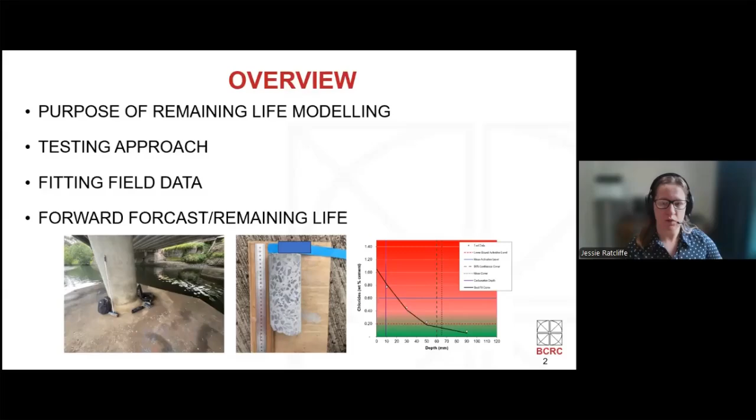We'll look at a basic model and the steps between our site tests and calculating that remaining life.

So there can be different reasons why an asset owner might want to investigate our current condition and then model the remaining service life. We may want to know the remaining life of buildings or bridges that were constructed prior to the existing design codes, therefore may not be compliant with current requirements, or for which we have limited information.

Drawings often get misplaced, or they're lacking key information, or that one guy who knew everything retires. It might also be a limited inspection history, so we don't fully understand how the structure has been performing during service compared to the design.

In other cases, we may be asking a structure to continue service life beyond what would reasonably be expected as the original design life. This could be for heritage reasons, like these 100-plus-year-old concrete bridge piles on the side here.

Or we may also want to keep the older structures for sustainability reasons. So why replace a structure and consume new materials when the existing thing is still fit for purpose? Adding on to that, keeping the old structure may be able to reduce costs.

Our on-site tests and modelling can be used to validate our design assumptions using actual service data and can provide updated service life if the service conditions change. For example, our changing environment may be affecting the structure differently.

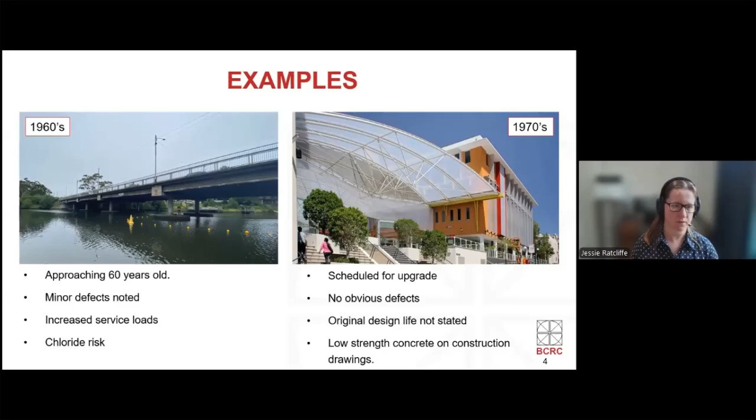So they can ensure that the upgraded building has an appropriate service life, so they've put in all that effort and can keep the structure for a long time.

Step 1 of our testing and modelling is the visual inspection, non-destructive or semi-non-destructive testing. In addition to visual defect mapping, you might complete half cell potential mapping or delamination testing, and other tests to hone in on areas of interest.

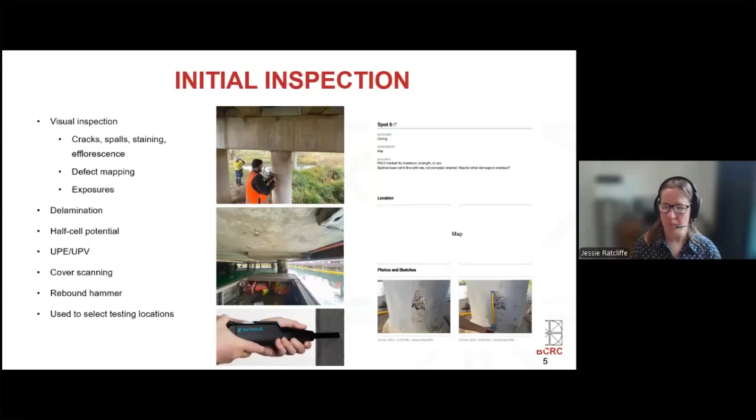Key tests we need to complete to understand the deterioration state of an existing reinforced concrete structure is the carbonation depth. Carbonation is the reduction of pH, also known as neutralization of the concrete, due to ingress of carbon dioxide from the atmosphere. During this process, carbon dioxide infiltrates the concrete and reacts with the calcium hydroxide in the cement paste. We've got some equations outlining this process here.

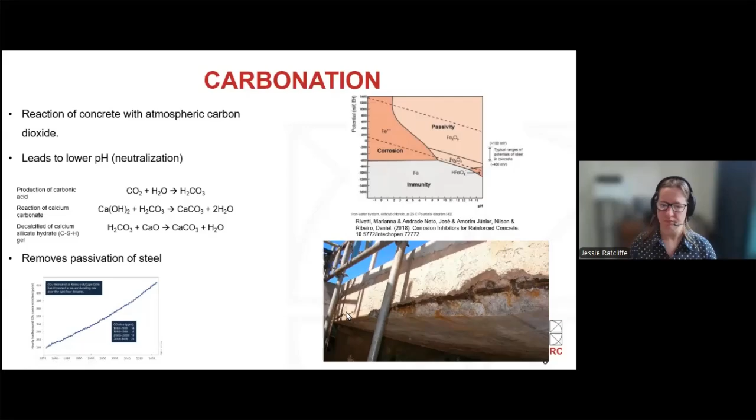So we test for carbonation using a 1% phenolphthalein spray. The spray is just a pH indicator that gives this lovely pink color when applied to uncarbonated concrete, and then it turns clear where the pH is below about 10.

The spray is applied onto fresh concrete, so either a core sample that you've taken and then split, or a hole that's been drilled and cleaned out. We can then measure the carbonation front, that's the interface between the two colors.

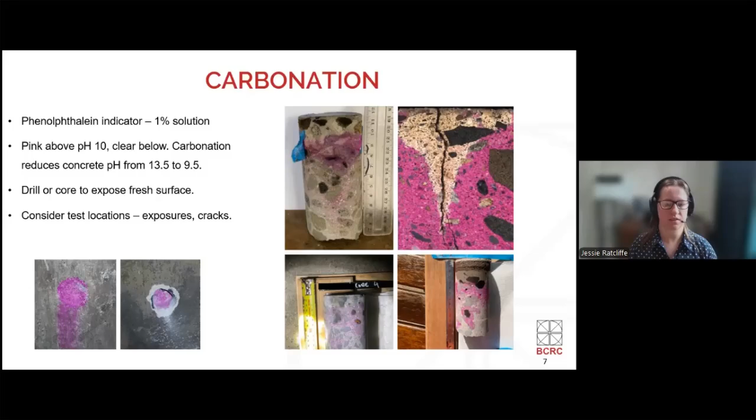We're also interested in the chloride profile of the concrete, that is the amount of chlorides present at different depths towards the reinforcement. Chloride ions enter the concrete by diffusing through the pores or through cracks, such as mechanically induced or shrinkage cracks. When the chloride ions reach the reinforcement, they can induce corrosion.

Similar to carbonation, they're thought to disrupt the passive film on the steel, reduce the pH level of the pore solution, and serve as a catalyst for oxidation of the reinforcement. Chloride-induced corrosion can be particularly aggressive in marine environments, but it's also an issue further inland where wind can carry chlorides. Magnesite toppings might exist, or chlorinations for pools and road salt can give you those chloride ions.

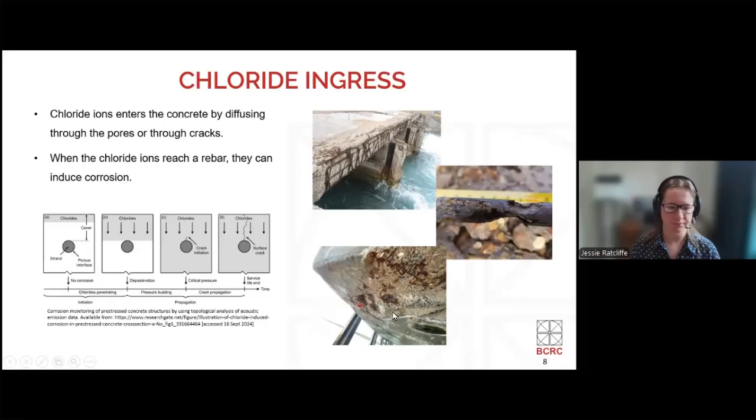We test for chlorides by taking a concrete core sample. The sample's location should be selected based on that problem-oriented approach using the inspection, or the half cell potential map, which might show you areas where we have a higher chance of corrosion occurring and should be investigated.

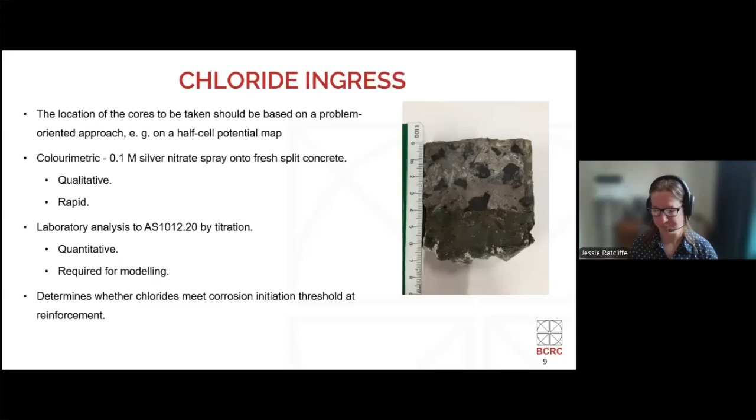This core also has a pheno spray applied, which is why we get this Neapolitan effect, because we're doing both tests. This test is fairly quick, but it doesn't tell us the specific amounts at each depth in the core. So to find that, we need to do lab analysis where we grind up each level and find the amount of chlorides via titration. This gives us quantitative information on chloride levels that we can use for our modeling.

The next piece of information we need is the concrete cover to reinforcement. It's because the cover is the protective layer between the steel reinforcement and the chlorides or the carbonation or any other aggressive species that might be present.

Once data is collected, we can assess the cover for the element or for the structure, and how we present this information actually varies based on the project. So we can consider minimum cover if it's a critical element, or we want a particularly conservative assessment.

But that might be overly conservative if you just have the one bar that's sitting a bit high and can be treated locally. Median and average are more common, but you could misrepresent the risk in the structure if the cover is very variable. So often we use the 95% confidence interval cover found via statistical analysis, and that covers most conditions in the data set.

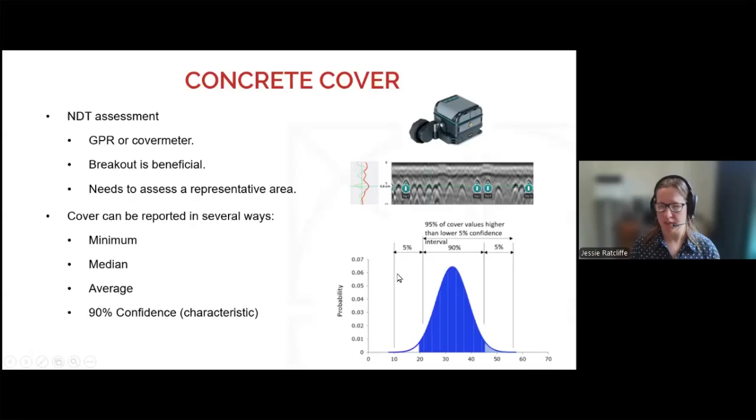In addition to our key condition assessment data, there are a few other factors we can measure while we're out there, including our cement content. If we're finding our remaining life based on chlorides, this is important because we are looking for 0.4% chlorides per weight of cement, not per weight of concrete.

So we need to know that cement content. We can also look at the reinforcement, do a breakout, particularly in areas that have those defects we noticed in the first stage, and assess any corrosion on the reinforcement, measure the size, and see if it's a plain bar or deformed bar. Can also consider measuring sulfates if our exposure suggests that might be a problem, and find structural details such as compressive strength of the concrete and the bar diameter.

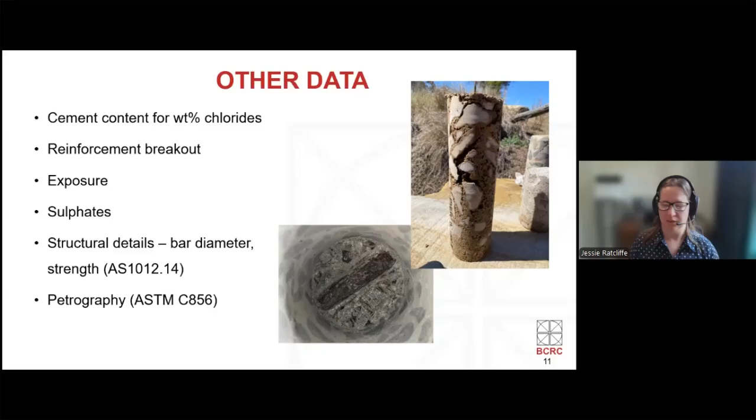Could also, if you think there's a risk of alkali aggregate reaction or something else, take petrography cores. Cores are also great for checking things like voiding and compaction in the sample. We have a really great example of some interesting compaction on the right here.

So now that we have our field data, we can start with the actual modeling. Our early service life estimates were just based on the square root of time approach and empirical data, sort of experience, to give us a minimum cover of concrete that should delay the onset of corrosion. So over time, that's been refined into deterministic models and full probabilistic models.

One of the documents that explains these principles of service life design and calculation is the FIB Bulletin 34 model code. This document presents strategies for service life design of concrete structures, including the concept of chloride-induced corrosion, modeled by diffusion through concrete according to Fick's second law.

When the corrosion is caused by chloride ingress, the service life is usually assumed to be equal to the initiation time, so when that steel is depassivated by the chloride and corrosion can start. We don't really consider the propagation, so the actual corrosion and spalling carrying on, because that can be relatively short in duration compared to the life leading up to that point.

And we don't really know, there's a lot of uncertainty around the consequences of localized corrosion. So exactly where that spall occurs could make it critical or a non-issue. So we don't consider that section.

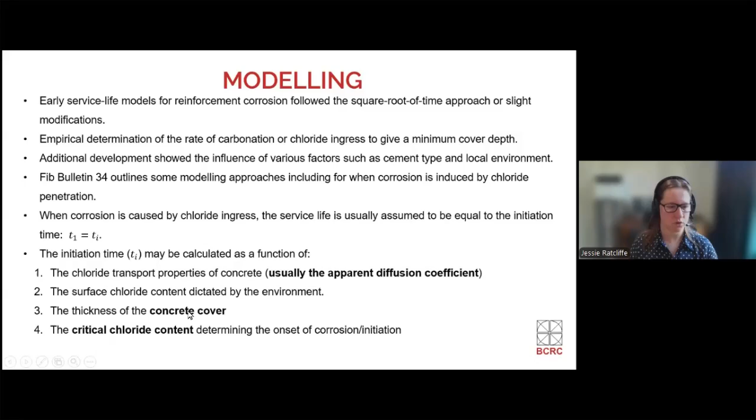Our initiation time, so our start of corrosion, is calculated using the apparent diffusion coefficient, which we'll calculate in a second. Our surface chlorides, thickness of concrete cover, which we've already talked about, and the critical chloride content, that 0.4% weight of cement.

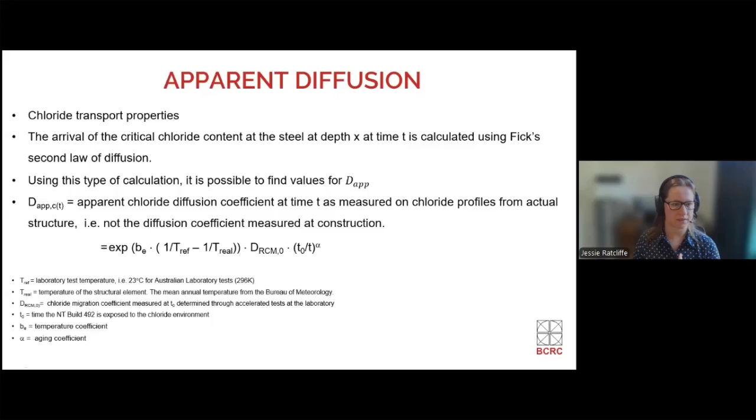So our first one is the apparent diffusion coefficient, which is our chloride transport properties. It's the equation there - we'll show it on a graph shortly, which is much easier.

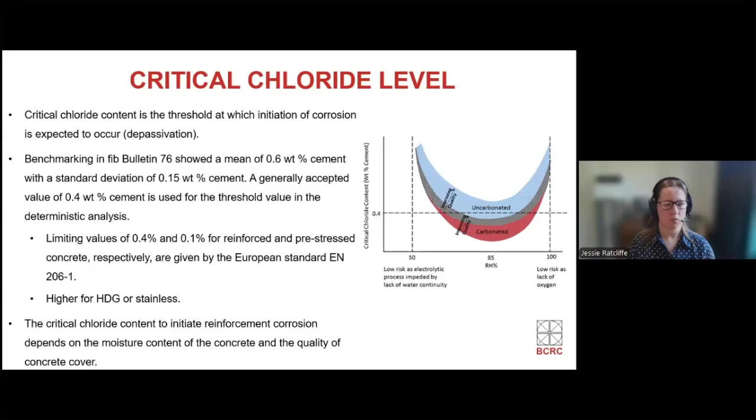Our critical chloride level is the amount of chloride at that reinforcing bar that we consider to be when it's likely to start corroding. It's typically taken as 0.4%, but different reviews and studies show, including the benchmarking FIB Bulletin 76, that is a fairly wide range. So it depends on your reinforcement, it depends on your structure, but the 0.4 weight percent is what we'll be using today.

So that chloride level is our service limit state. So that's where we're saying that the structure has passed beyond what we accept to keep it in service.

And that is defined by the asset owner, so it's whatever they're comfortable with. The 0.4% weight percent chlorides is commonly used, but it doesn't have to be that.

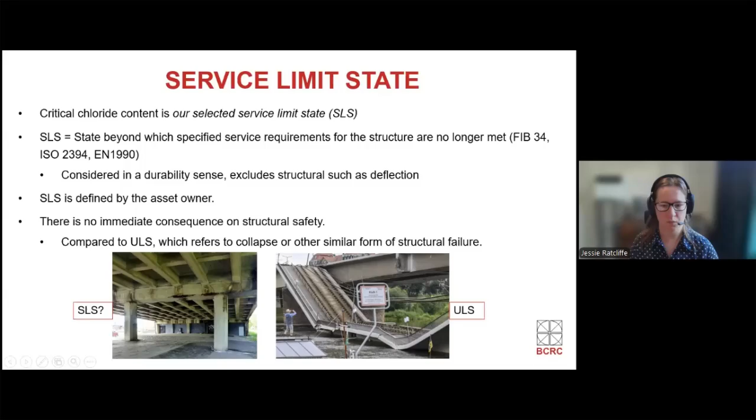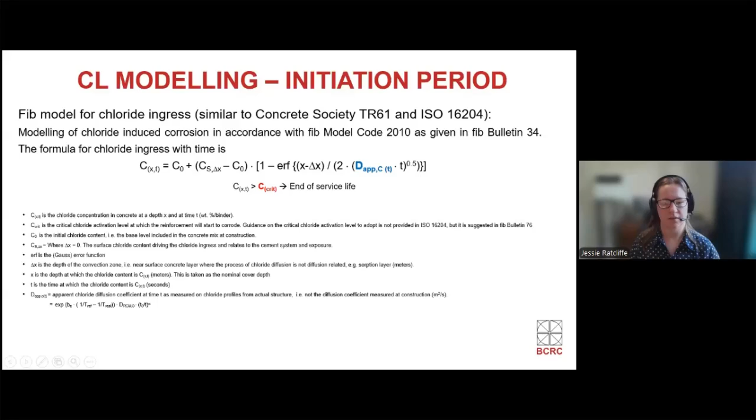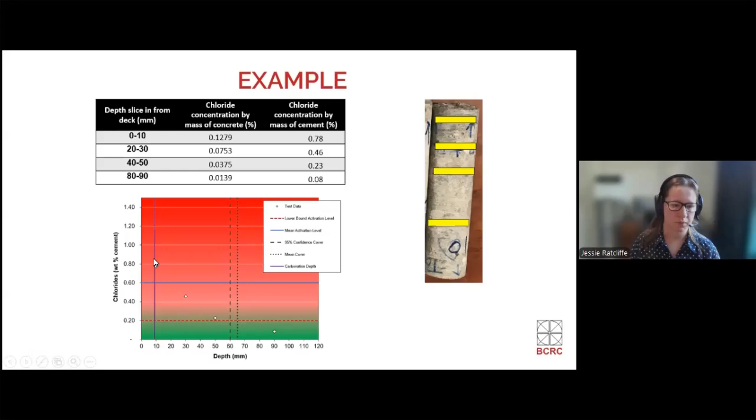So to show how this all works, I've got some example data. Say this is our core, and we've sliced it at the level shown on the right. We have this chloride data as weight of cement. We can plot it, and you can already see a curve sort of appearing. Then using our equation from the model code and the least squares method, we can fit that curve and find our apparent diffusion coefficient.

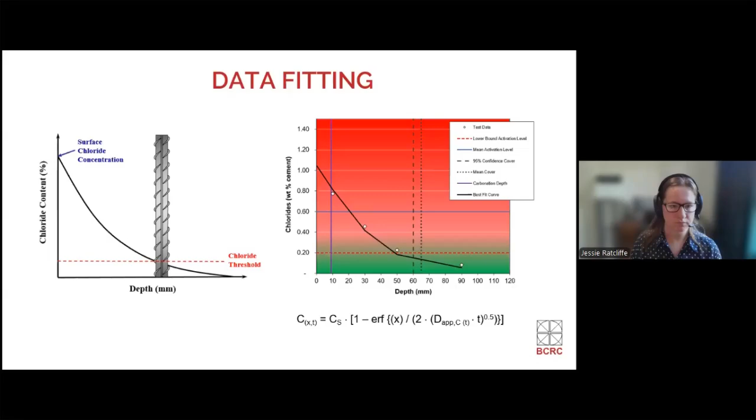So that is based on site data. That's not the diffusion coefficient that would have been measured at construction or present in your spec or your mix design. That's based on what we've really found.

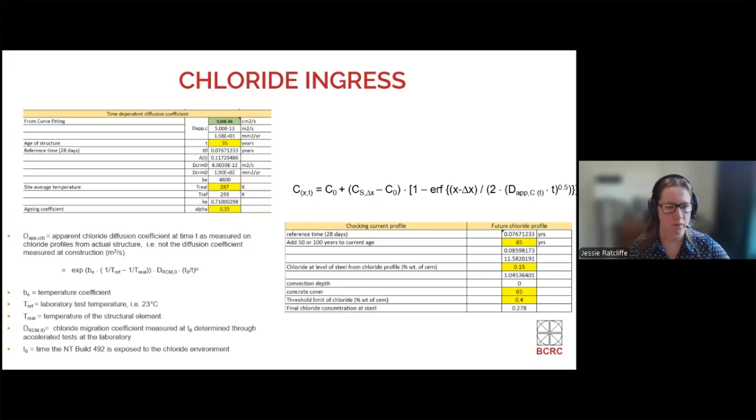Using the equations, we can then take our diffusion coefficient and calculate curves for the chloride amount at different times, using the current age of the structure, the average temperature either from BOM or from site measurements, and then the aging coefficient. And we finally get to our final plot.

So we have a plot of our current chloride levels heading towards the reinforcement cover, represented by the vertical dotted lines—that's our average and characteristic covers. You can see initially we're nowhere near our critical level of 0.4 weight percent of cement.

However, after 50 years—that's our yellow line—we are getting pretty close. We might be considering that in localized regions where we've found a higher bar with less cover, we could be considering some issues.

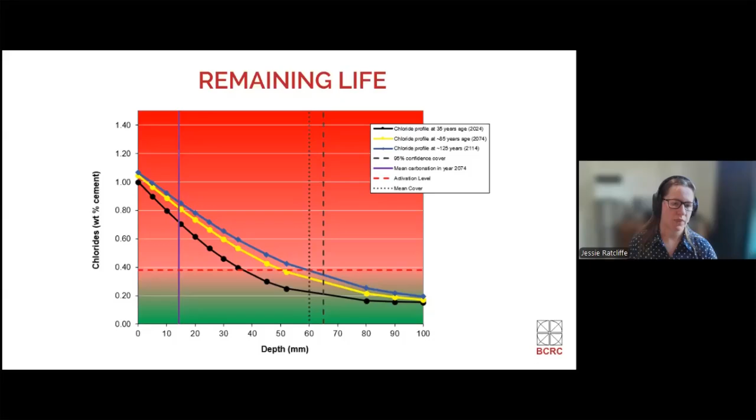And then our service life ends when the structure is 125 years old—90 years on—where it intersects our average cover. So what do we use this data for?

Now that you know your service life, well, in our example of the university, they have opted to do additional testing that creates more representative data and can be used for a full probabilistic model, which is often less conservative because they want a little bit more certainty before they move forward.

You might use the data to focus on problem areas, engage in repair and strengthening if it's approaching end of life but you want to keep it going.

Or in the case of, say, our 90 years left, that seems like plenty. We can just use that for proactive maintenance and planning of costs, so we know when we're going to have to start thinking about replacing the structure based on that knowledge. That's useful for asset managers who want to work proactively instead of reactively.

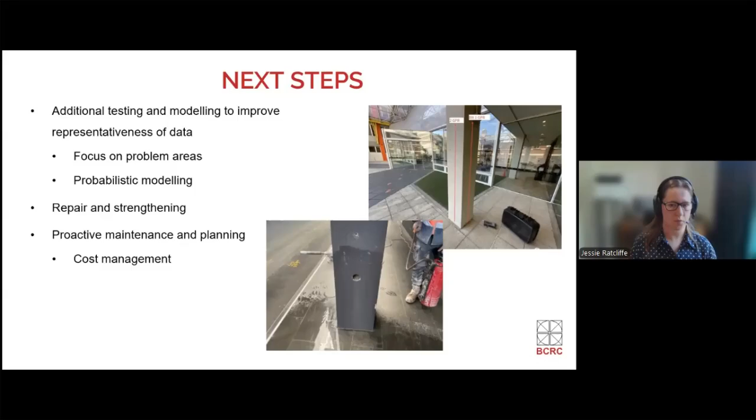And that's it. Thank you very much.

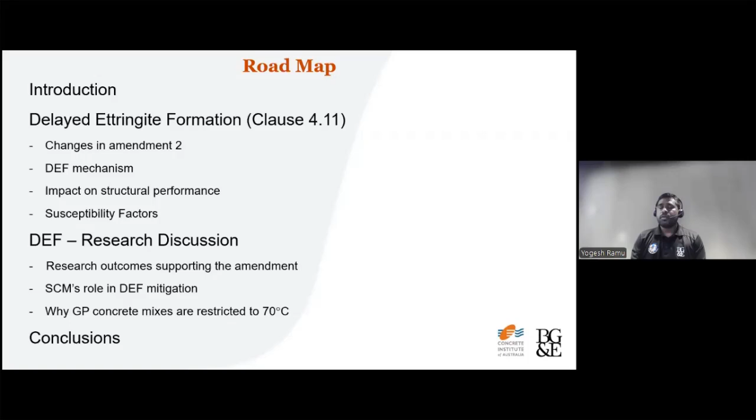Maybe it's just my interpretation of why these changes are made. I'll also talk about some other researchers' results and outcomes to support this amendment 2. Then we'll talk through SCM's role in DEF mitigation, and why GP concrete has a lesser maximum curing temperature allowance. Then we'll wind up this presentation.

So first, what are the changes made in the 4.1.1 amendment 2? So until 2018 amendment 1, all concrete mixes had to satisfy the 75 degrees Celsius maximum allowed curing temperature.

Unfortunately, it wasn't differentiating between plain concrete mixes and concrete mixes with SCMs in it. Although the performance is actually very different between an SCM mix and a GP mix in terms of strength development, heat of hydration, and resistance to many durability issues, it doesn't differentiate. Also, another issue is it doesn't provide any approved method to justify it.

It just says if some analysis is provided to exceed the limit, is anyone okay with that when there is no approved method in the standard? So the welcome move in amendment 2...

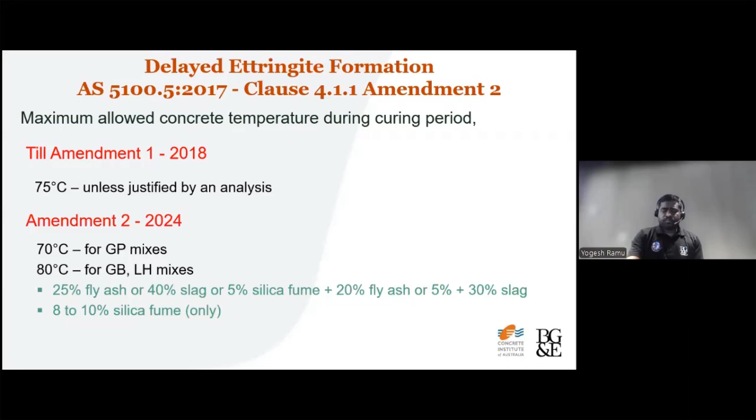So to understand and make sense of these amendments, we have to understand what ettringite is, and what delayed ettringite formation is, first. Then we'll talk through why this amendment makes logical and scientific sense. So what is ettringite first?

Ettringite is one of the various hydrates actually forming in concrete. It's basically a calcium sulfoaluminate hydrate. During the initial hydration phase of concrete, if it's precipitating, we call it primary ettringite. It doesn't harm the concrete; in fact, it has some benefits to the concrete.

So that's not an issue, but the issue is ettringite is highly unstable when it comes to resisting high temperatures. So if the concrete is actually hydrating at a very high temperature, say for instance anything above like 70 to 80 degrees Celsius, the ettringite can disintegrate, decompose to monosulfate and sulfate ions in the concrete.

So what can actually happen - I'll just use the laser pointer to point out. The black dots in the graphical representation in the slide actually represent monosulfate. So what this can do is, in the concrete during its service life, when the concrete temperature goes back to normal, and when there's a favorable situation for the alkalis in the concrete to leach out from the system, say for example exposure to water or something...

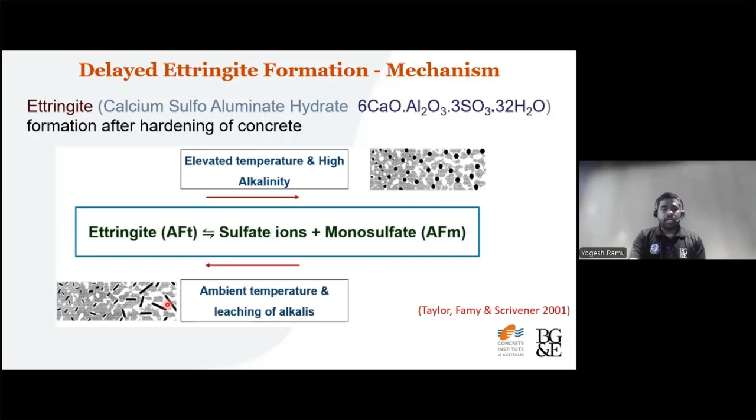So as I said, it could impact the durability of the structure. I'd like to explain it through a couple of examples.

When it is tested, it actually has a lot of needle-like ettringite precipitated in the precast sleepers. So in general, people think DEF can be an issue in precast concrete, but not in in-situ concrete. But it's actually not so true.

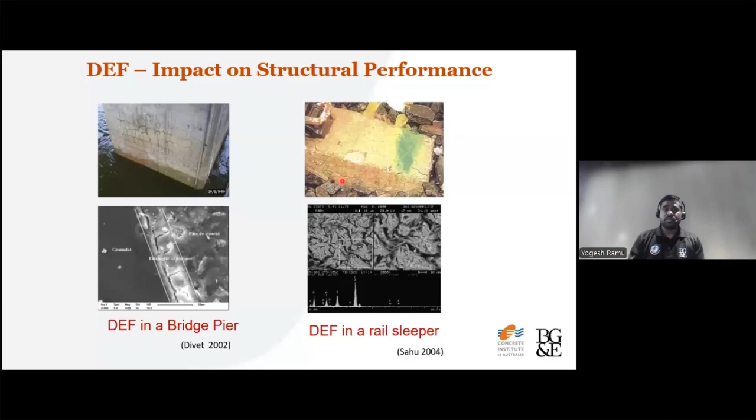If you look at any concrete elements which are actually quite large, it can lead to very high temperature that can potentially decompose the ettringite formation, and so can result in DEF. So I purposely picked two examples, one from in-situ and one from precast concrete, so you have to be mindful in both, not just in precast concrete.

Some of the factors that could aggravate the DEF issue in concrete are cement factors. First I will talk through cement factors. DEF can be very problematic if the cement has anything above 4% or higher sulfate content in it,

and relatively higher aluminate content, and alkali close to 1% in cement. Then the sulfate to alumina ratio, if it is in the range of 0.8 to 1.0, it can lead to highly expansive DEF in concrete.

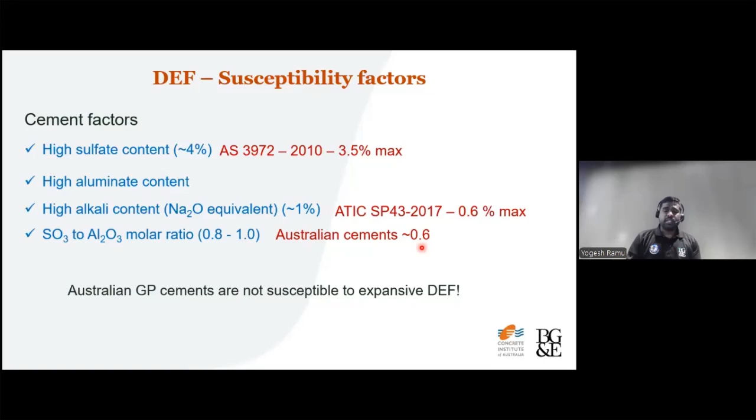Luckily, Australian standards are actually pretty good. They restrict sulfates to 3.5, and alkali levels are restricted to 0.6. Typically, Australian cements have like a 0.6 sulfate to aluminate molar ratio, which is actually below the levels required to have highly expansive DEF. So from a material and cement chemistry perspective, Australian cements are not that susceptible to expansive DEF, but it's not the only factor that can lead to DEF.

As I mentioned earlier, concrete temperature, whether due to self-heat of hydration or steam curing, can be problematic. That's why this amendment is actually restricting the temperature here to 70 to 80 degrees Celsius.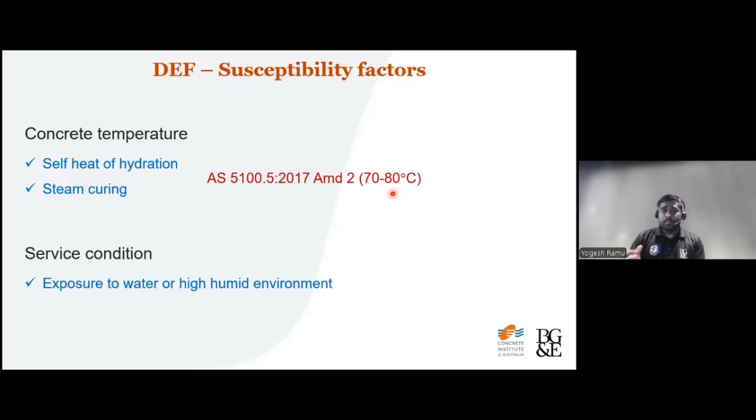And then the service condition - if you remember the earlier example I showed you, the concrete was actually touching the water. So exposure to water or a high humidity environment can lead to expansive DEF, just by promoting leaching of alkalis from the concrete, at least in the cover zone.

So I will talk through one example for in-situ concrete and then one example for precast concrete where the chances of DEF are pretty high.

This is one of the bridges currently under construction in Perth. This is actually a twin beam - I cropped it just to show one beam of the bridge structure. This is roughly 1.8 meters deep, a very large pour. It was planned with a 65 MPa concrete mix, which actually had 65% slag in it.

Even with 65% slag, if it starts around 29 degrees Celsius, it can potentially reach up to 80 degrees Celsius. Sorry, this is not a steam curing profile - this is actually a prediction from CIRIA C766.

So you can see it's not necessarily only precast concrete that can go up to very high temperatures. Even in-situ concrete, even with 65% slag in it, can go up to roughly 80 degrees Celsius if it is not controlled properly at the early stage, if it's a very large concrete element.

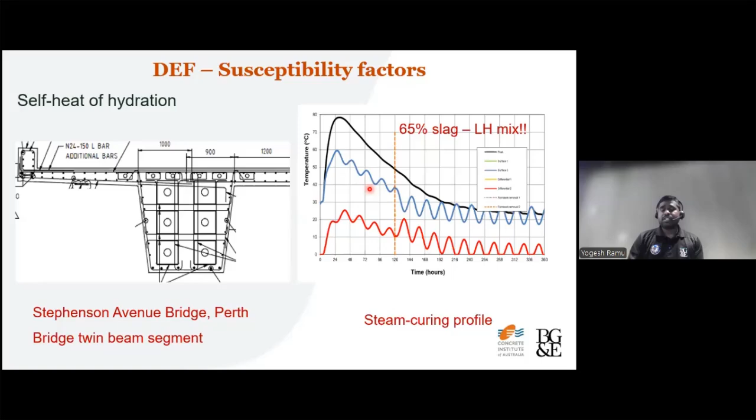So the other example I want to point out is from a precast concrete producer in Queensland. These bridge girders are manufactured for the Legacy Way project. As you can see on the left side, the precast girder is actually very deep.

It's roughly 2 meters, and the concrete actually had a 25% fly ash mix in it, but it still went up to 80 to 90 degrees Celsius when it was cured at 55 degrees Celsius. So high temperature in concrete is possible even when there are SCMs in it, whether in-situ or precast concrete production.

So DEF can be very much a possibility here, but just with the temperature we cannot say for certain. We need to analyze all the other factors like cement binder chemistry and exposure - everything we have to consider to arrive at the conclusion whether it's going to be expansive DEF or just DEF sitting in the concrete that doesn't do anything to it.

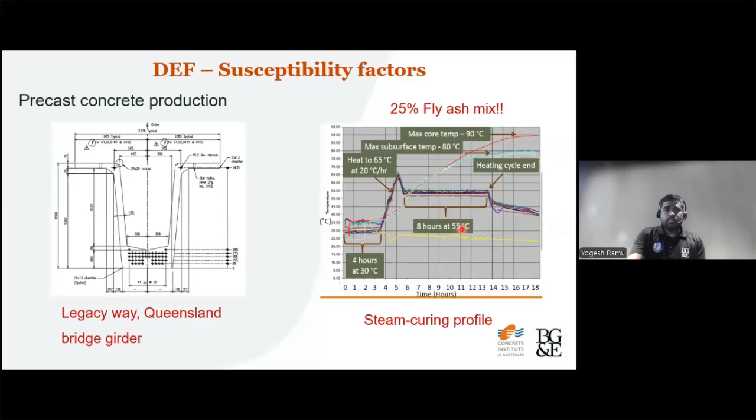In this section I'm going to talk about some of my research outcomes done with Australian materials to justify Amendment 2. So I actually took this Legacy Way materials and did some research on it in the laboratory.

So what we actually did is take the Australian GP cements and produced some laboratory mortar prisms, exposed them to 90 degrees Celsius curing, and studied it for like 3-4 years. You can see the Australian commercial cements don't produce any significant expansion. So in laboratory specimens, if there is an expansive DEF precipitating, it's going to give some expansion in the length comparator study, but it doesn't have any expansion for Australian commercial cements.

But if you see the chemically modified cement with 4% sulfate and 1% alkali in it, it started to give very significant expansion within like 50-60 days, and it's reached a maximum of roughly 1.1% for one cement, and for another cement roughly 0.8% maximum expansion.

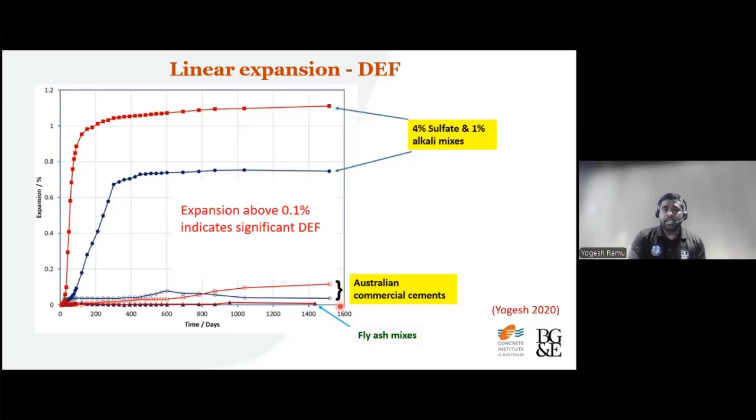So why some cements expand and some don't has to do with the chemistry, as I mentioned earlier. Australian commercial cements are not that susceptible to expansive DEF, which is good news for us. And even with the high sulfate and alkali cements, if you replace that with 25% fly ash, you can actually eliminate the expansion even in the worst cement cases. That's why adding SCMs to mitigate DEF is a practically viable option.

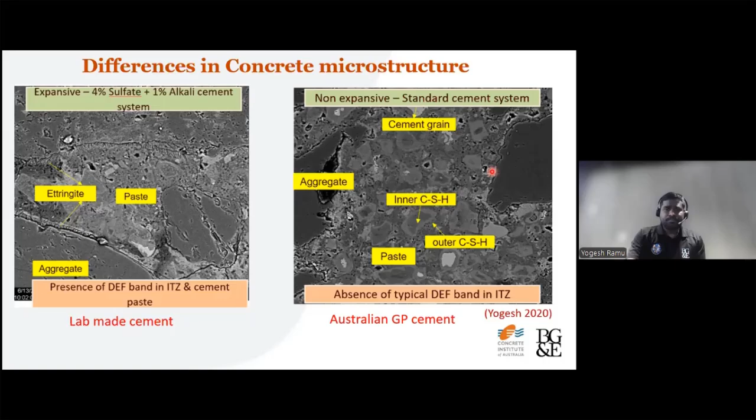I'll talk you through some of the differences in concrete microstructure for these two cement systems. As you can see here, the lab-made cement with high sulfate and alkalis shows a lot of ettringite actually precipitating between aggregate and cement paste, and also within the cement paste. Whereas the non-expansive system, you couldn't see any ettringite getting precipitated between the cement and aggregate interface.

So what's actually happening is the reactive silica in the fly ash is consuming this Portlandite to form additional calcium silicate hydrate, which is a denser, more impermeable, strength-giving cement hydrate in the concrete system. So basically what the fly ash or any other slag or SCM does is consume a lot of calcium hydroxide and precipitate that into CSH.

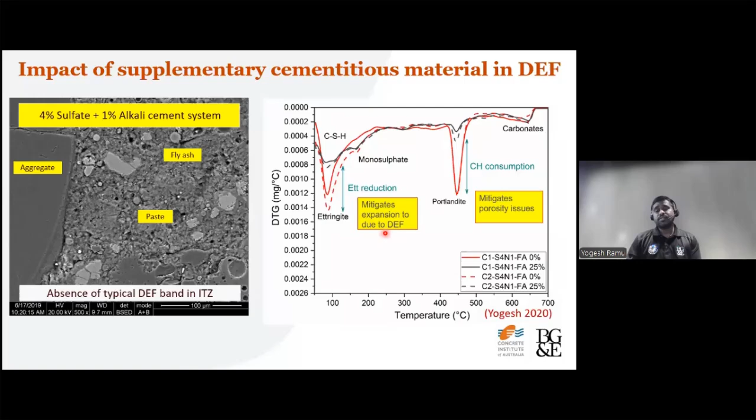So what's actually happening is there's a lot of pore refinement happening in the structure, which makes the concrete less permeable, and also mitigates - it has very little ettringite getting precipitated in the system, so it mitigates the DEF expansion as well. Is it only fly ash that does it?

No, if you see some examples from other researchers who studied slag systems as well, you can see the plain GP systems have very high expansion when cured at 90-95 degrees Celsius, but with 25 to 35% blast furnace slag, you can see almost the expansion is eliminated here.

And also, as I already mentioned, it leads to a lot of pore size refinement. If you look at the right side, you can see the RCPT, rapid chloride penetrability test results, where with increased slag replacement level, despite being cured at 80 degrees Celsius, it's actually having very low charge passed, which means very low permeability in the concrete samples.

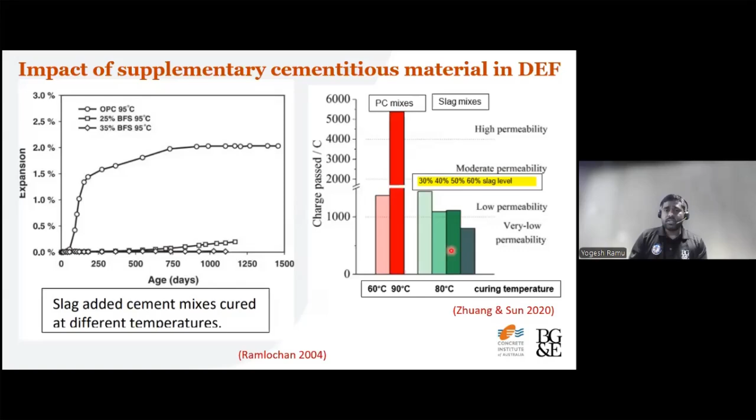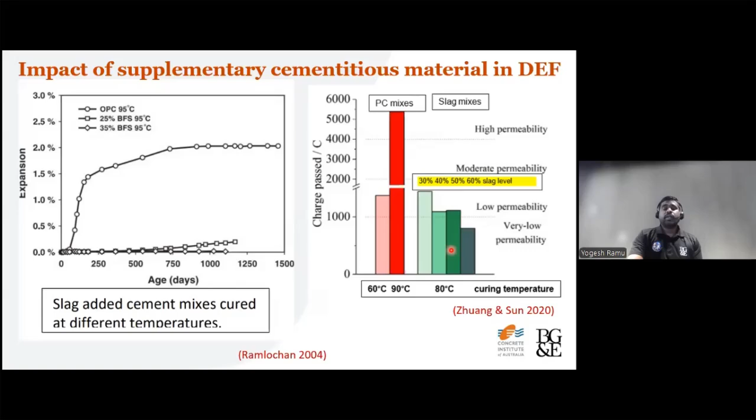That's why the amendment 2 is allowing up to 80 degrees Celsius, considering the fact it can lead to a lot of pore refinement in the concrete with the SCMs in it, and also it can potentially reduce the overall temperature, and eliminate expansive DEF in the system. Now we will talk through why possibly plain GP concrete mix is restricted to 70 degrees Celsius, unlike the 80 degrees Celsius for the SCM mixes.

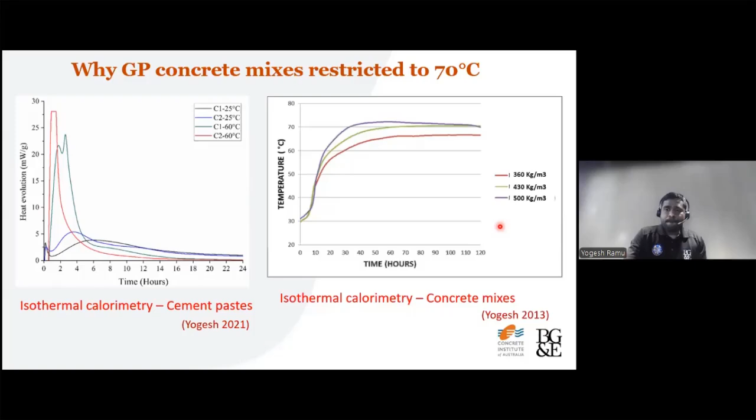As the temperature goes higher, the impermeability of the concrete is actually reducing, which again is due to the coarser hydrate formation. That's why if the concrete is expected to go beyond 70 degrees or so, it's better to have SCMs blended in it.

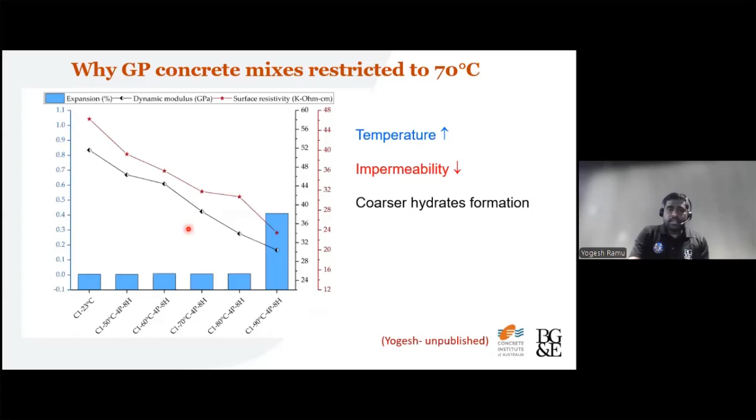It's not only me who did this - some other researchers also tried to explain it with other test methods. From 5 degrees Celsius to 60 degrees Celsius curing temperature, the porosity keeps reducing as the degree of hydration gets higher. But for the 60 degrees cured samples, even after the degree of hydration is beyond 90, the porosity remains roughly 10 to 15%.

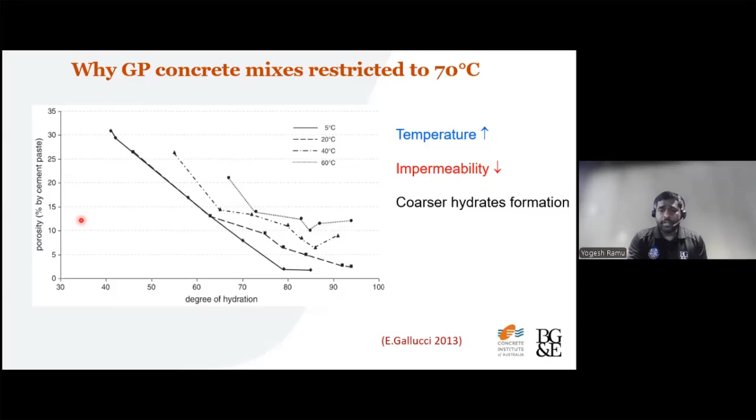This justifies why we need a lot of SCMs in the system. For concrete with a similar heat profile, this pore refinement is much better, and the porosity can be very well reduced by using SCM.

To conclude, massive concrete structural elements can easily go beyond 70 degrees Celsius even with SCMs. The advantage with SCMs is that it can mitigate DEF even if this goes beyond 70 degrees Celsius, and also can help in the pore refinement as well.

SCMs can help even if the cement is having much higher sulfates and alkalis in it by accident - if we are getting some cements from abroad and accidentally it has more sulfates in it, even in that situation adding SCMs makes a lot of sense to mitigate DEF. It makes sense to amend to have the 80 degrees Celsius mark, because many larger concrete mix pours are going to reach 70-80 degrees Celsius anyway, and when the concrete has SCM in it, people should not worry about DEF, as it has the tendency to mitigate and attenuate precipitates in the system, and also can help make the concrete more impermeable.

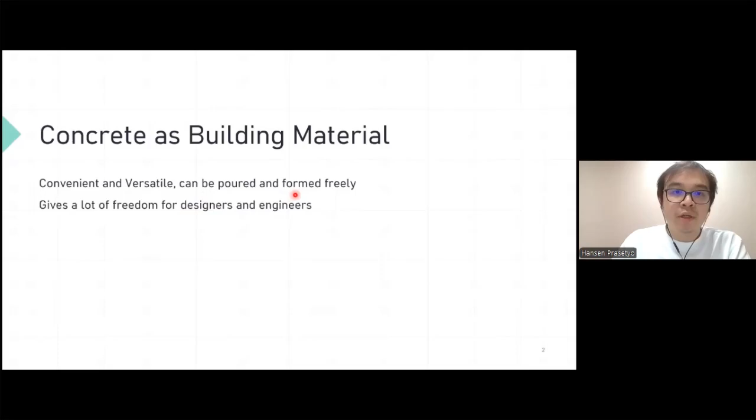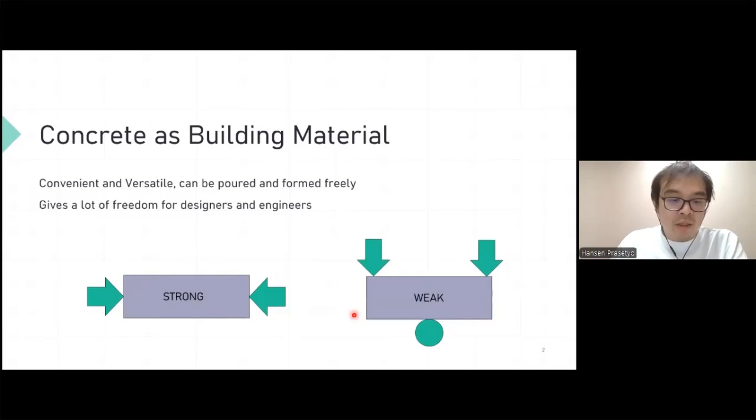As you all know, concrete is the most commonly used building material because it's very convenient, versatile, can be poured and formed freely, giving a lot of freedom for designers and engineers. Its main characteristic is that its compressive strength is exceptional, it's strong, but when subjected to tensile stress it is rather weak.

So when men started using concrete, they had to build based on these qualities. The Romans, for example, used concrete in compression only. That's why their buildings had arches, so that the geometry of the building makes it stable and the stress applied is only compressive, not tensile. But sadly, when we build like this, it makes it hard to span distances.

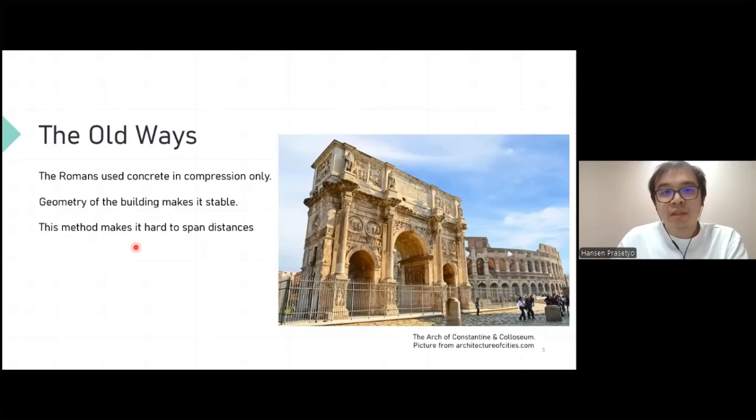So we had a revolution, and this was big - the French Revolution. It happened in France. Joseph Monier, a French gardener, came up with the idea to put steel bars in concrete when casting. Apparently he was just trying to make his flower pots stronger. But now that we have this, using steel rods in concrete, concrete can stretch and bend much better.

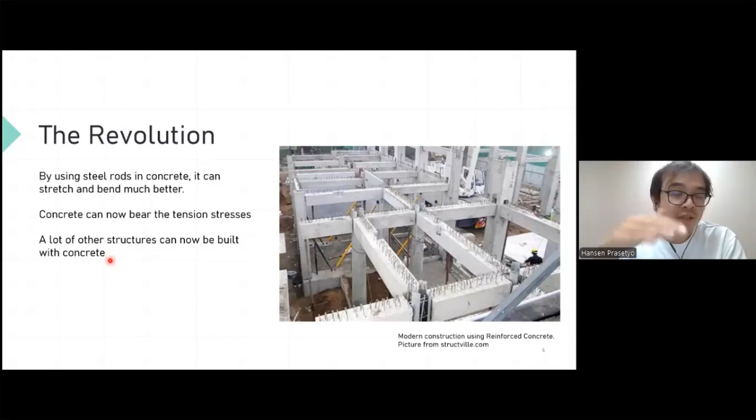It can solve the problem of low tension strength, bear the tension stresses, and a lot of other structures can now be built with concrete. For example, bridges that we before always built using wood - we just ran with it. We built a lot of buildings that need tensile strength. All modern constructions are made mostly using this super material.

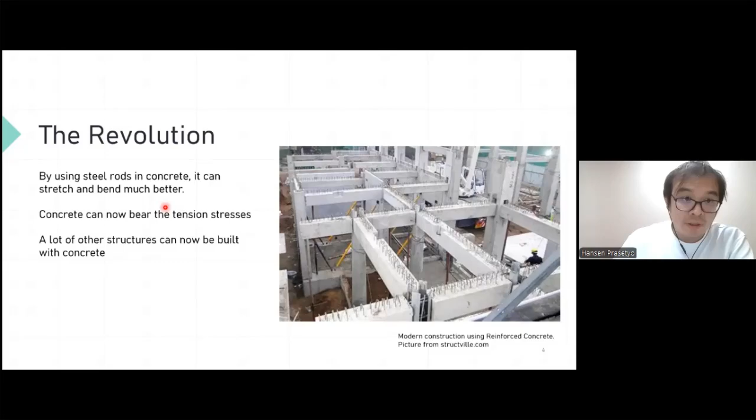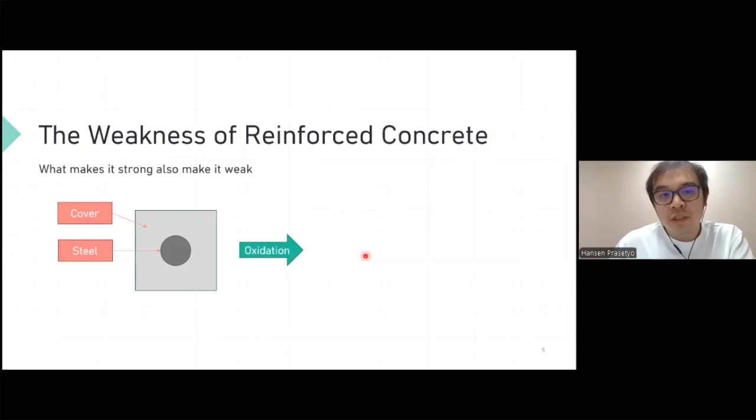Sadly, even though we solved that problem with tension strength, now that we have a steel bar in concrete, it makes it strong but also makes it weak. For example, look at this cross section of a concrete prism with a steel bar in it and a concrete cover. The problem with the steel bar is that oxidation happens and it starts to corrode. Some rust appears, then expansion happens, cracks happen, and the structure is then compromised.

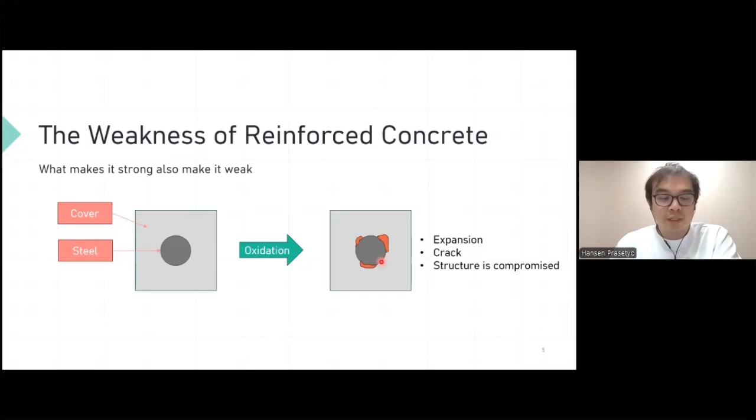The effect of chloride attack can be severe, as you can see in these pictures. When it gets to this level, the structure is no longer suited for use. So if before, those colosseums lasted for thousands of years, now it only lasts maybe 100 years, maybe less.

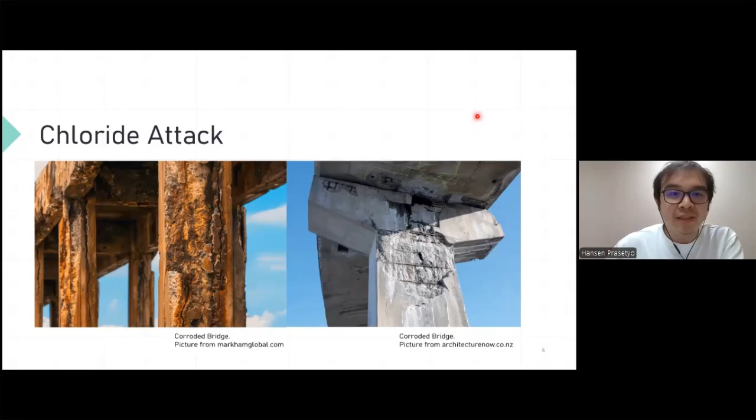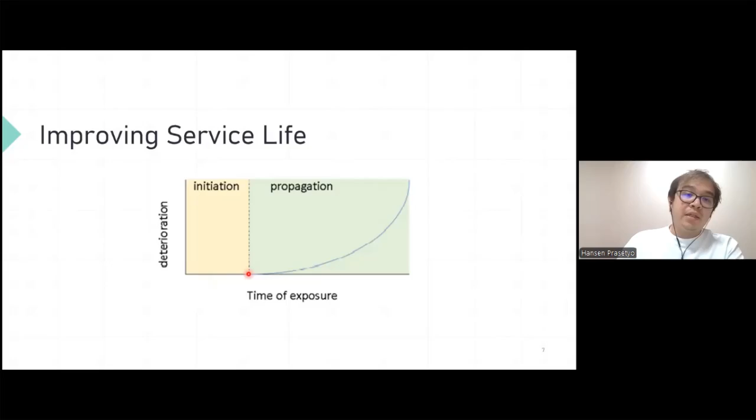How do we improve it? We must first see how deterioration happens in concrete. This was covered by Jessie already, but there's an initiation period and a propagation period. During the initiation period, deterioration doesn't really happen - it's just a buildup of chlorides in the concrete cover. Then when it reaches a certain threshold, it turns to a propagation period where corrosion happens exponentially and the reinforcement starts to give up. So the idea is to prolong this initiation period to be as long as possible, delaying the propagation period and extending the service life of concrete.

My research is based on concrete self-healing. This is a well-documented phenomenon that happens when cracks occur in concrete - calcium hydroxide reacts with air and water to create calcium carbonate crystals, and these crystals can seal the pores.

For example, we can look at this graph from another researcher - she's from UNSW, and she also made her research in concrete self-healing. On the first day, when a crack is induced, we can see that this crack is quite visible, but on the third day it started to heal up, and on the ninth day the concrete is fully healed - the crack almost fully disappeared.

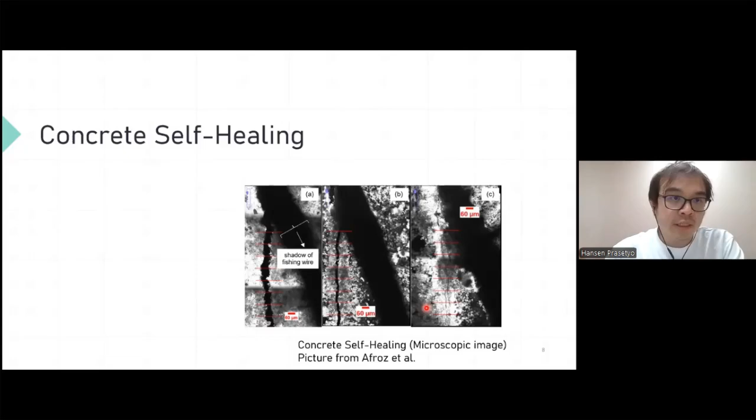This self-healing phenomenon can be further enhanced with admixtures, and crystalline admixtures are one such product that can help us with that. These admixtures are already available in the market, and there are a lot of makers who make them.

The idea is that it stays dormant in the cement matrix, and then when cracks happen, water and air will go into the cracks, and it will trigger the crystalline formation.

I took these pictures from a YouTube video of Penetron, one of the makers of crystalline admixtures. In the cement matrix, when a crack happens, water goes in, and then also air, and it reacts. The crystalline admixtures react with it, and it creates this crystalline formation that seals up the crack.

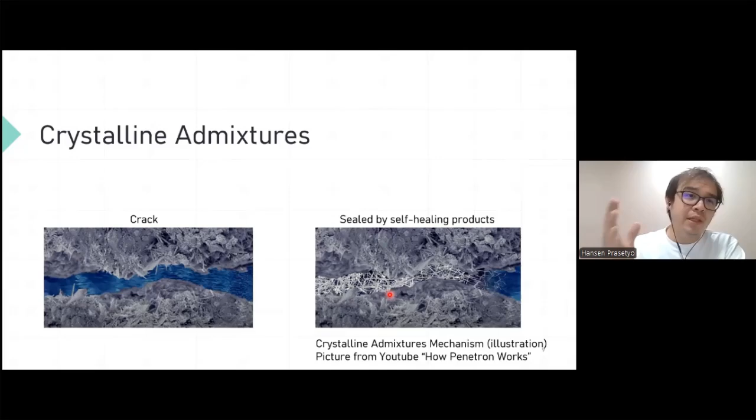By sealing the cracks, we delay the chloride ingress and hopefully prolong the service life. So we try to prevent chloride from reaching the steel bar.

There is a lot of literature already covering this topic. My focus will be on its effect on overall durability. I'm doing this with an uncracked sample at the moment to see the full effect of CA on the cement matrix.

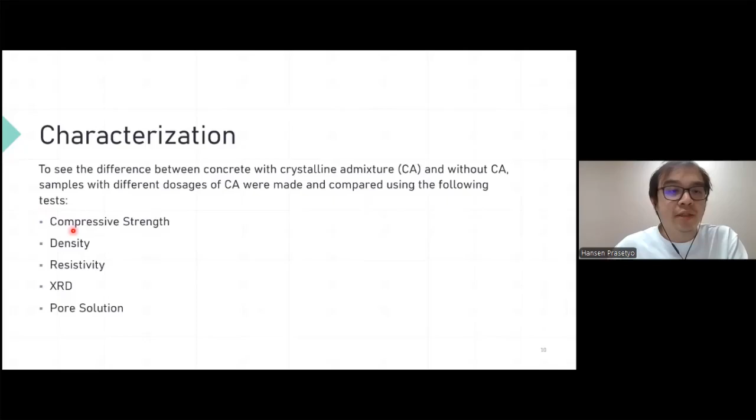So to see the difference between concrete with crystalline admixtures, or CA, and without CA, we use different dosages of CA, and then we compare them using these tests. We use compressive strength test, and then density.

We check for the density, we check for the electrical resistivity, and I also did XRD and tests on the pore solution.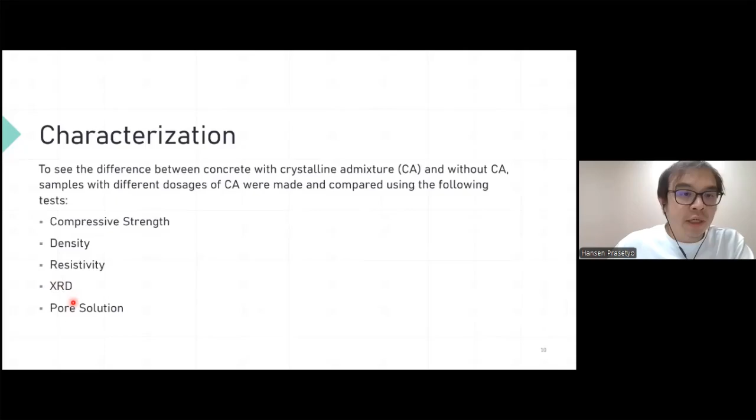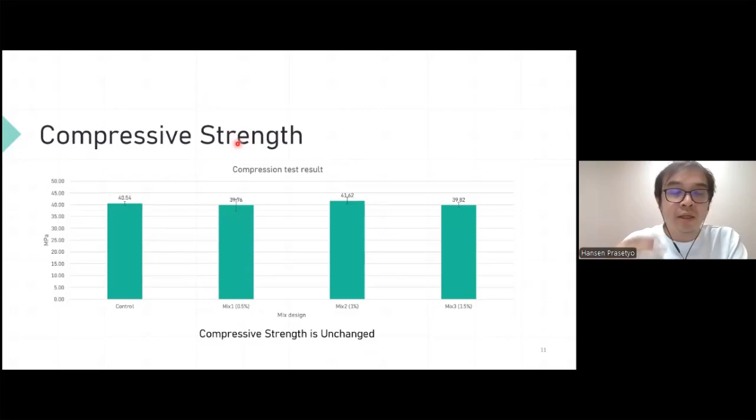The result of the compressive strength is that, without CA, and then these are the mixes with CA, respectively 0.5%, 1%, and 1.5% of CA added, we see that the compressive strength is unchanged. That's good — it means adding CA doesn't reduce the strength in any way.

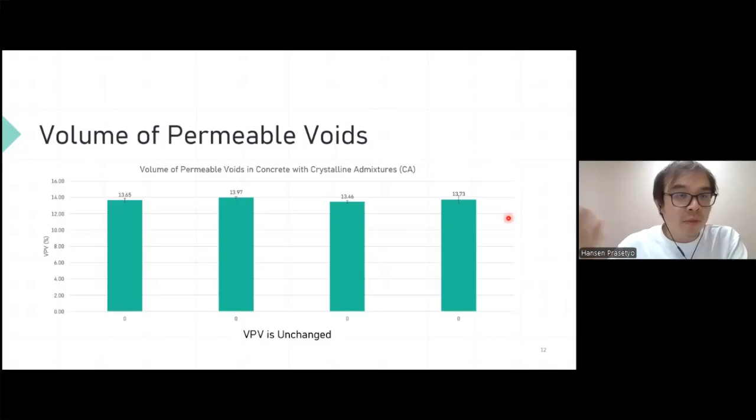Also, we checked for the density, and I did this by doing a VPV test. Same thing here: without CA, and then some addition of CA at 0.5%, 1%, and 1.5%. There is basically no change here, which is good — that means the density stays the same with the addition of CA.

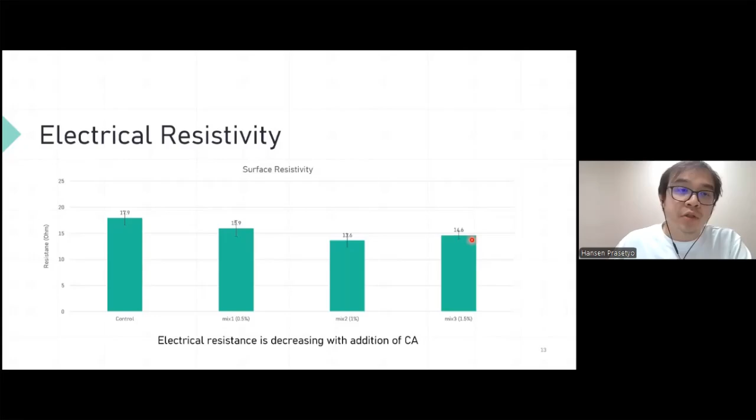With its electrical resistivity, here is the first difference that we see. We see that the electrical resistance is decreasing when we add CA into the mix, and yeah, this could mean something, but we'll talk about it at the end.

I also did X-ray diffraction to see whether the constituents of the solid phase differ from each other. For the reference, I had 2 reference samples, and then 2 samples with 1% of CA added.

As far as my eyes can see, they are the same. There's no difference qualitatively. This is not a quantitative test, but as far as I can see, they're the same — the solid phase is exactly the same.

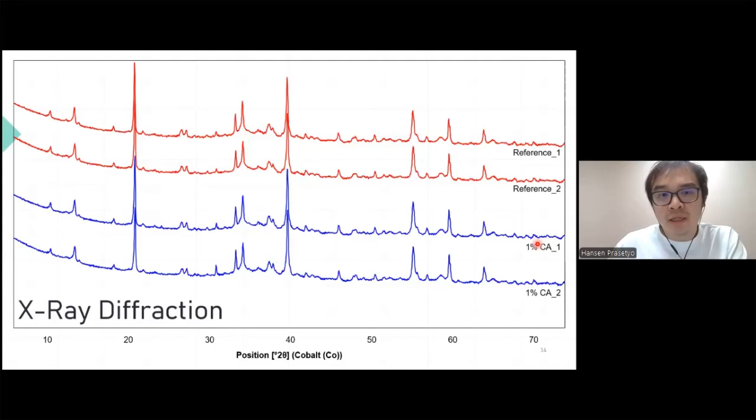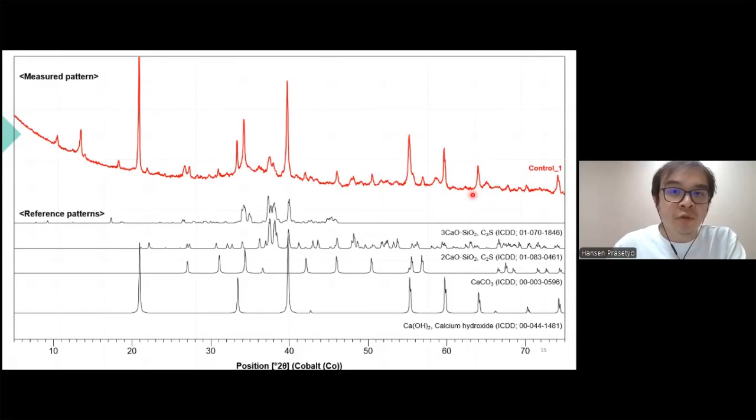Well, it's only 1% of CA being added, but for the moment we can say it's very, very similar. Diffraction patterns also show just the usual components of cement paste. There's nothing special that appears when XRD is done on the hydrated sample.

Since the solid phases are very similar, we just need to check the pore solution. From a pH test, it shows here that when we add more CA, there's a slight increase in pH, which is small, but it's good because higher alkalinity can help preserve the passivity of the steel rebar.

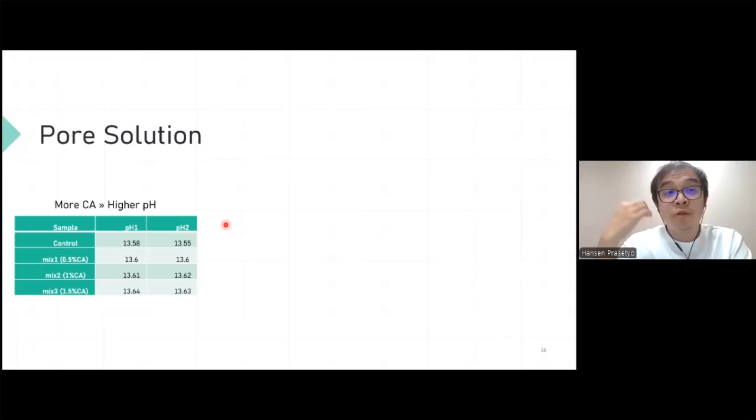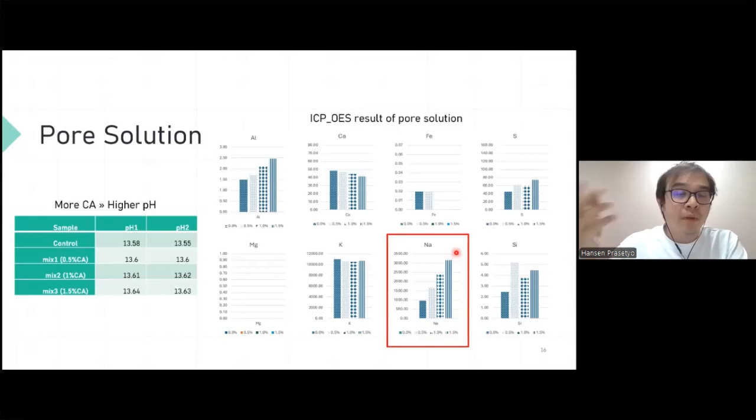In the pore solution of my samples, I see an increase in sodium when we increase the dosage of crystalline admixtures. The other ions don't really show this clear of a result, so we might have to think about what it means if there's a lot of sodium in our pore solution.

We also did chloride diffusion. This was also done by titration. I think this is similar to how Jessie did her test for chloride diffusion, and the apparent diffusion coefficients were also measured using Fick's law.

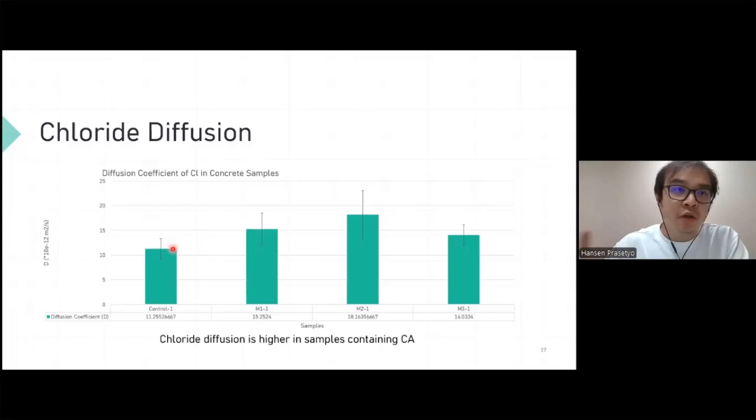The result is, weirdly, we have an increase of apparent diffusion with an increase of CA. That's not good — it means that when we add CA into the mix, we have an increase in chloride concentration, while it's supposed to be doing the opposite. But keep in mind these samples are uncracked, and the increase is not very significant.

Ultimately we want to measure corrosion in the steel bar, so we did an electrochemistry test. I made this sample by casting a steel bar, a reinforcement steel, inside concrete, and connecting this reinforcement with wires so we can measure the electrochemistry aspects of it.

We put the samples in the chloride solution, a sodium chloride solution. We did a 3-week cycle: 2 weeks in dry condition and 1 week in wet condition.

After 1 year, so we did 18 cycles. We see that corrosion progresses faster in samples without CA. In the chloride diffusion test, we see higher chloride in samples with CA, but also lower corrosion in samples with CA. That's a bit interesting.

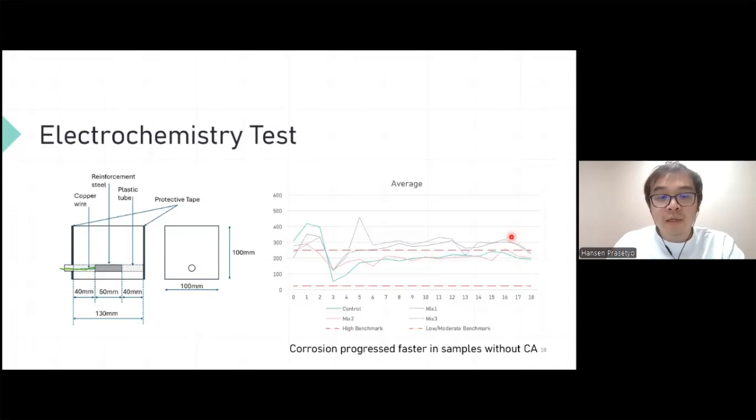So I am continuing this test even at the moment. At the end of this measurement, I will break these samples and take pictures of them. This is an example, an image that I took of the samples.

So we had some corrosion here. Using MATLAB, I made a code to pick up the pixels where it's brown, basically where the corrosion is, and then we create a mask using that code, and then we can calculate the percentage of corrosion.

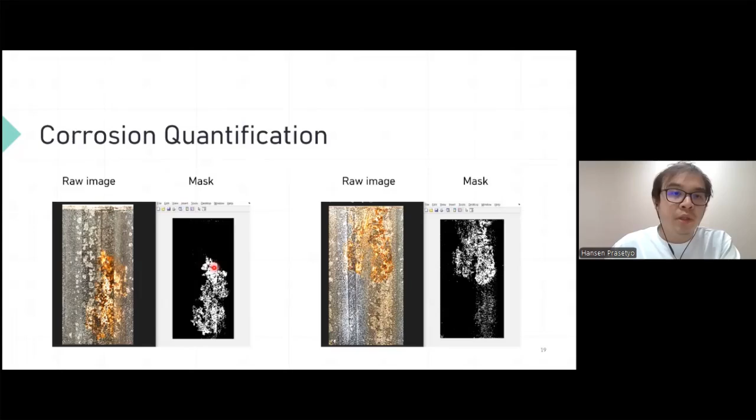At the end of the testing period, I will break all of them. I will visually confirm the corrosion, take pictures, and measure the corrosion using this code that I wrote.

To conclude, the solid phases are mostly unchanged with addition of CA, but the composition of pore solution became a lot more ionic. Maybe that's a cause for concern, because we can see that electrical resistivity went down in samples with CA. Also, the high sodium concentration in the pore solution might skew the balance of other hydration reactions. The higher concentration of chloride in samples with CA needs to be investigated.

But I think it could be because what I did was a total chloride test, so maybe some of that chloride was bound to something else, and maybe it was a mistake to use acids to do the titration. If I do it with water, we could have a different result. So I'm doing that right now.

We have a decrease of electrical resistance that I mentioned before. This might be caused by the reactive pore solution, but it's a cause for concern because it means that electrons can travel more easily through the concrete, and it means chloride can travel more easily inside the concrete.

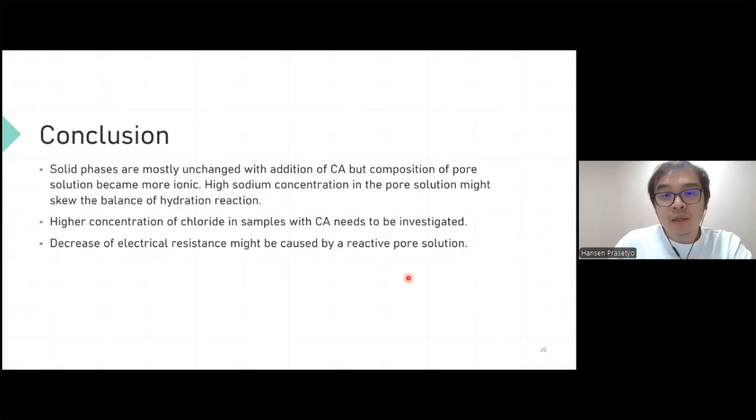And then the next step in my studies, I will do this test with cracked samples, since now we've characterized the CA samples without cracking and analyzed the cement matrix. So I think it's good to move on to do these tests with cracked samples, and possibly a combination with other self-healing materials can be interesting as well.

We can use some fibers, we can use super absorbent polymers. These are also some materials that have been proven to help self-healing.

So using this research, I hope that in the end we'll have more ideas about how to prolong the initiation period to delay the corrosion of the reinforcement bar, and that way we'll have concrete with better durability. That's all, thank you very much.